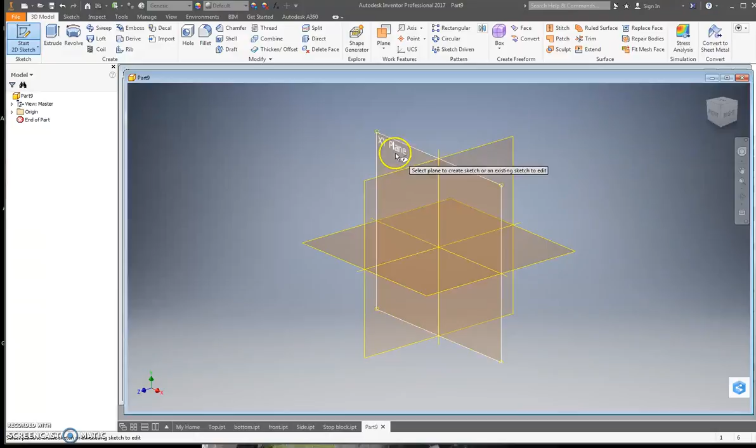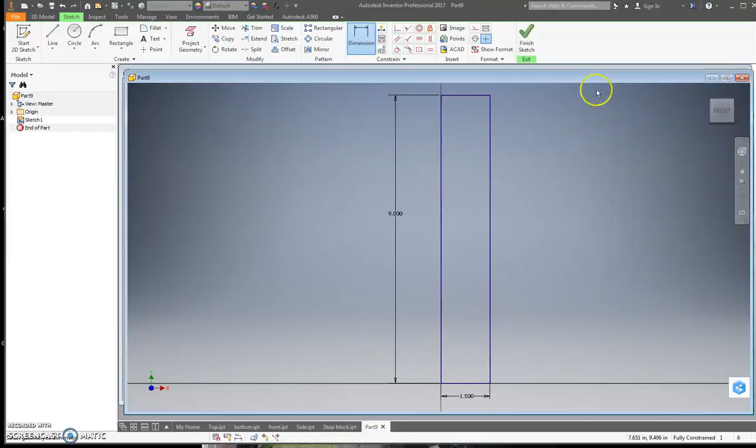Start at my starting point, and I start drawing out my rectangle. Okay, and then I'm going to dimension. And from here, I finish my sketch. I'm going to extrude it to the thickness that I need. Now here's the start of my slider.

The next thing I need to do is start to draw where my holes are going to go. In order to do that, I need to again go back to 2D sketch and click on this face. Now, what needs to happen with this is I can't do all the holes at one shot. Okay, I need to draw the holes in pairs with the same sizes. So I can start with the holes that I'm going to put towards the top and towards the bottom that the dowel is going to go into. Alright?

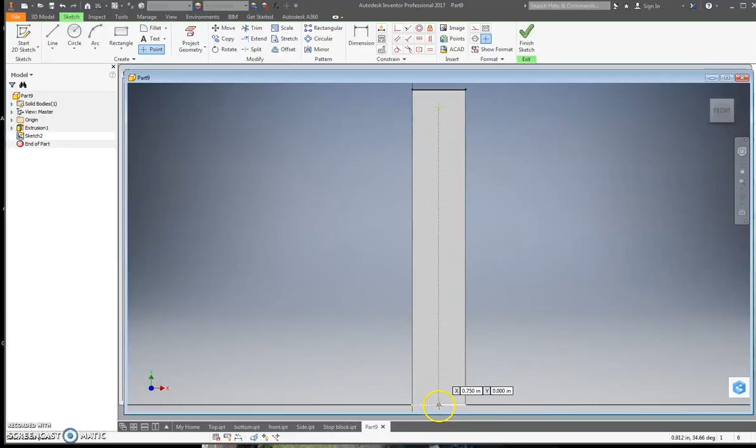So I start with point. I'm going to put one up here towards the top. And I'm going to start with one sort of near the bottom. So I'm going to dimension from the side over, and that one should be 3/4 of an inch. If my piece is 1.5 inches wide, half of that is 3/4. So that should be good.

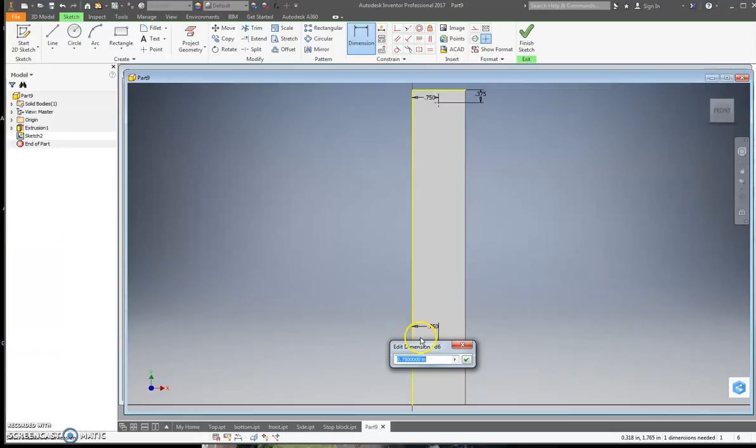Now I need to dimension from the top to this point. Maybe. There we go. And that one should be 3/8 of an inch to the center. Alright. And now I need to dimension the bottom hole. Again, from the side over, that should be 3/4 of an inch. Now I need to dimension from the bottom to my point. That should be 1 3/8. As you can see, both of the points now are purple. They're locked in place. I'm going to finish my sketch.

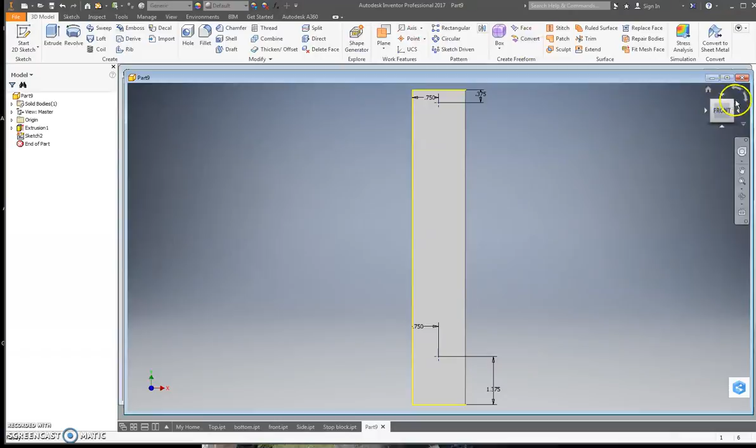I'll turn this. Now is when I go to hole. Alright, I was going to drill both of those holes in that spot. And this is why we need to place the points for the holes that are going to be the same size. If I try to do holes that are going to be two different sizes, this isn't going to work out. So they have to be holes that are going to be the same size.

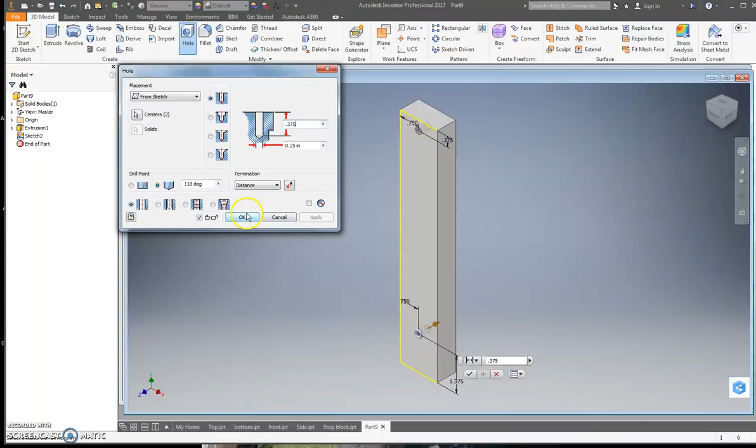Alright, first off, my depth. Okay, that's what it's showing me right here. Needs to change to half the thickness of my piece. So if my piece is 3/4 of an inch thick, half of 3/4 would be 3/8. So 0.375. Okay, now my diameter. The diameter is going to stay at 1/4 of an inch. Once those are here, I can hit OK. Right? And they shouldn't go all the way through. If I turn my piece, they don't come through the back side.

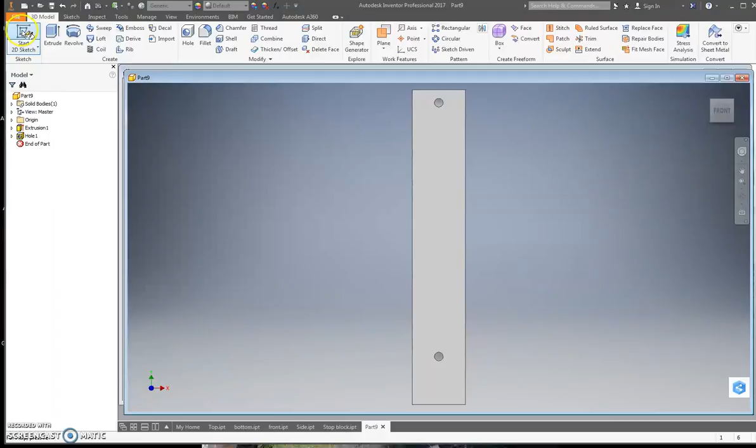Now for my next point, I'm going to do the big hole that the gumball is going to go into. So I go back to 2D sketch, and I'm going to click on this face. And just like before, I'm going to go to point. Right? And if I go here towards the middle, you get the dotted line here. It's showing me that it's in the middle of this piece. I can click again.

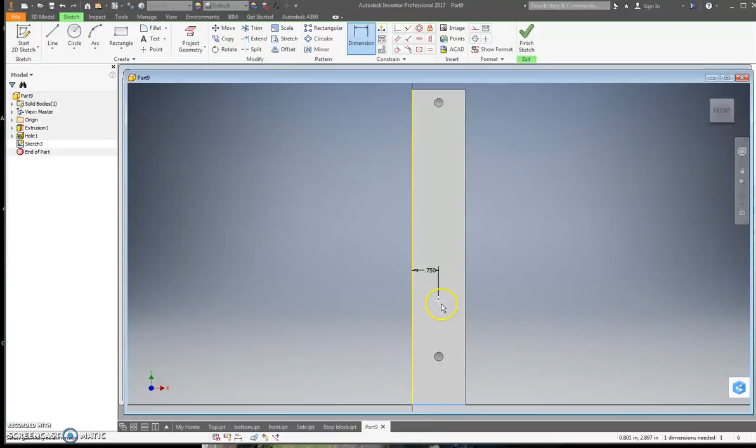I'm going to go to dimension. If I did that with the dotted line, I should get 3/4 of an inch right off the bat. Right? Click there. You need to click on the bottom line, and now go to dimension and slide this over. And if you measure this correctly, we should have 3.5 inches. Right? The point's purple. I finish the sketch. Turn this so I can see it.

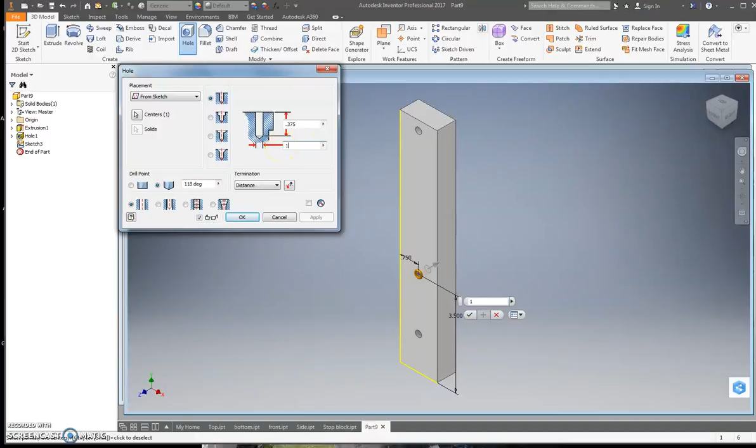I'm going to go back to the hole command. This time, this hole is going to be 1 inch. Right? And my depth needs to go all the way through. So you can just type in 3/4 of an inch. Then I hit OK. Now, that hole goes the whole way through, right?

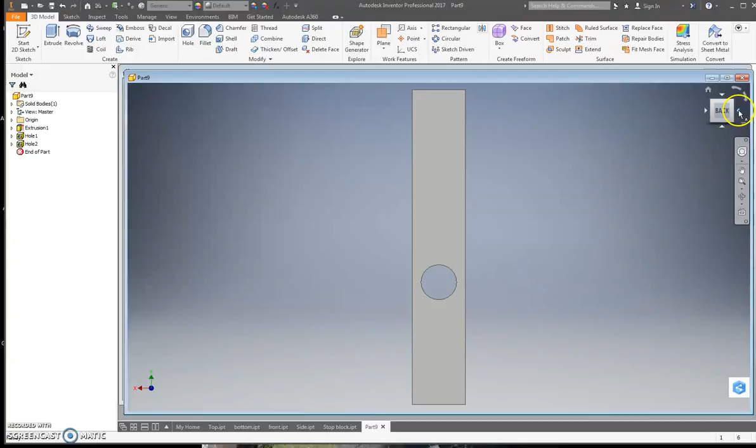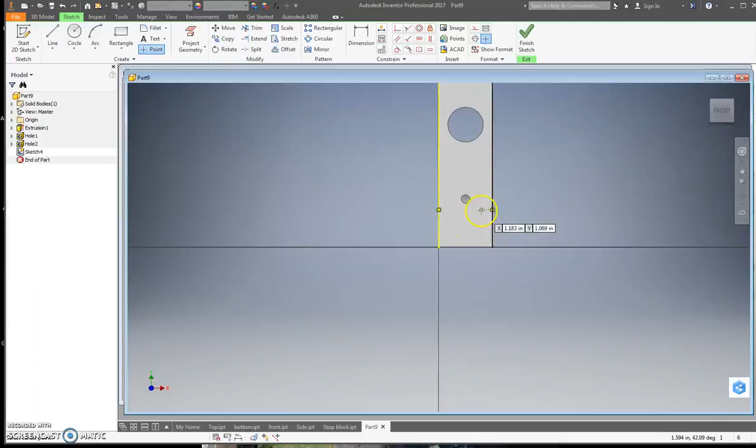Last thing I need to do is put in the holes where the finger holes are going to be. So, back again to start 2D sketch. Back again to this face. And then I'm going to place 2 points. And these 2 points are going to be right on the edges here. Alright, because I'm not going to be inside, I want these right on those edges.

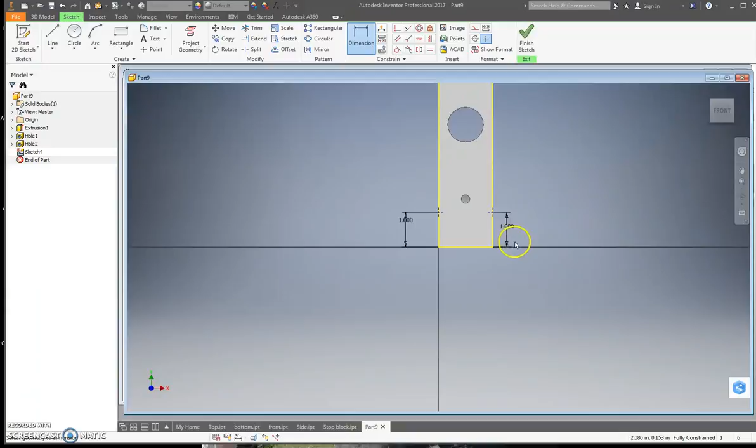I'm going to go to dimension. I'm going to click on the bottom line and then on the point. That should be at 1 inch. And this one should be at 1 inch. When I have those, I can finish my sketch.

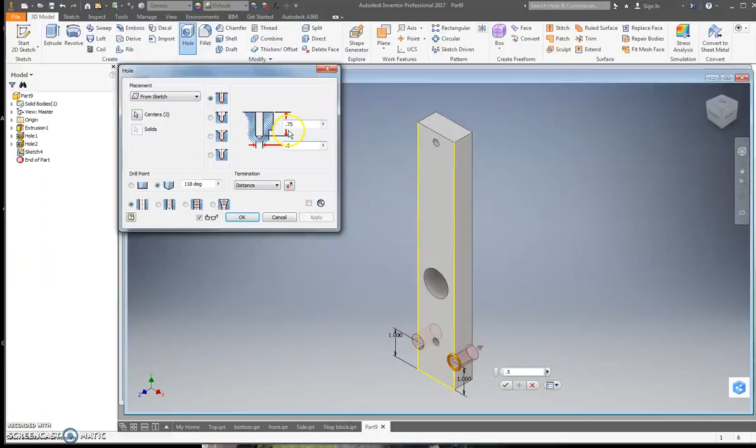Turn this. Go to hole. And I'm going to change my diameter here to 0.5. Okay, it's a 1/2 inch. The depth can still stay at 3/4 of an inch. I'm going to hit OK. And now my slider is complete.